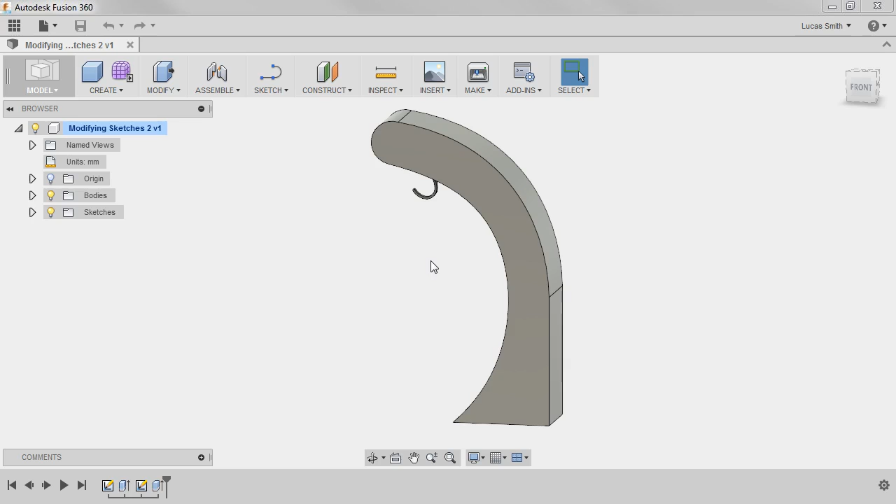This sketch will create a base for the banana hook, so I want to make sure that I create the sketch on the bottom face of the model. The geometry I want to project is on the top of the hook, so I'll switch to the top view from the view cube. I'll activate the projection command and click the short line at the top, and then all the edges in a clockwise direction.

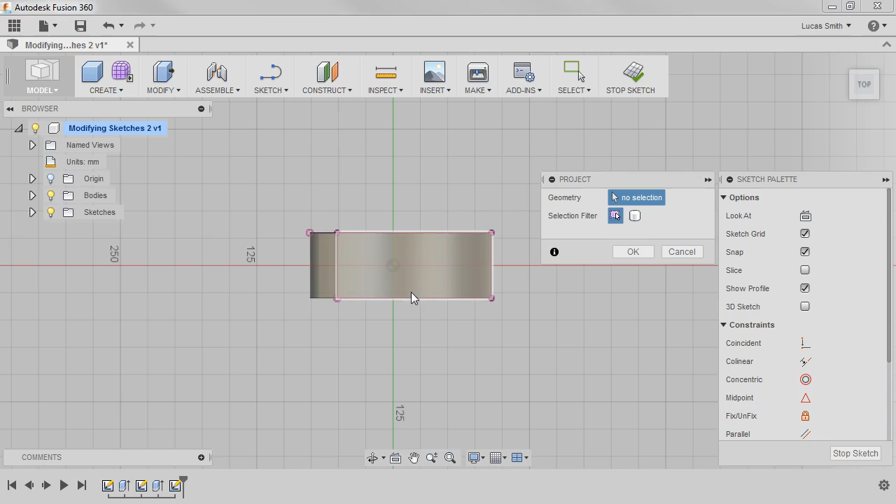When I get to the left edge, however, I can't select it because it's a curve. I'll have to fill this area in with a line. I'll click OK to end the projection and activate the line command.

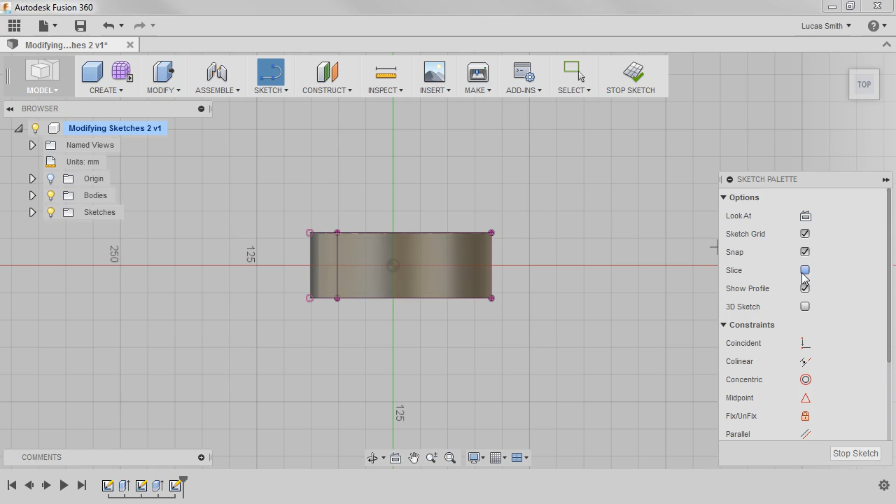Before I sketch the line, however, I'll make sketching easier by activating the Slice option from the Sketch palette. With that enabled, I can now easily see the plane to work with. I'll finish the left side by sketching a line between the endpoints of the projected geometry.

Next, I'll add sketch fillets to these corners. But since I can't alter projected geometry while it's linked, I need to first break the link to the existing geometry. I'll click both lines while holding Control, right-click, and select Break Link.

I can now add the fillets, so I'll activate the command and click both corners. I'll make sure the radius is set to 10 millimeters and hit Enter to add the fillets.

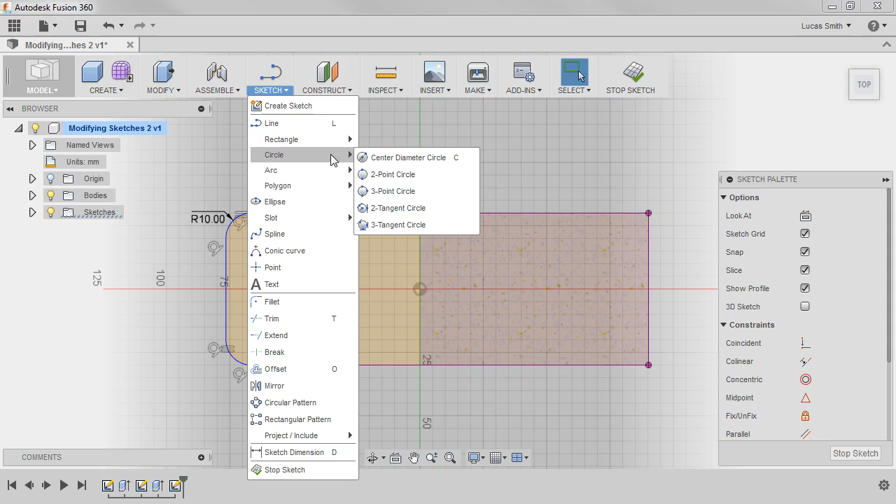Finally, I'll add a circle and pattern it to create the sketch for the feet. I'll activate the Center Diameter Circle command and start the circle on the center point of the fillet arc. I'll use the text box to set the diameter to 10 millimeters and hit Enter.

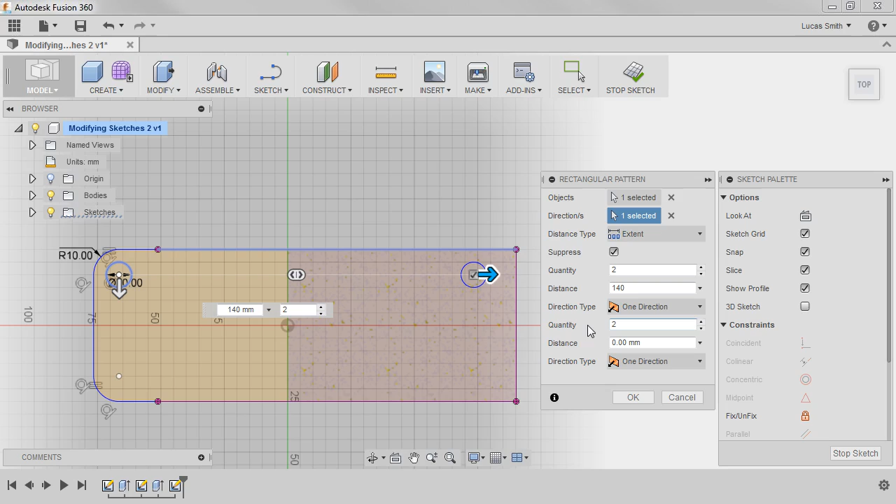To pattern the circle, I'll activate the Rectangular Pattern command and select the circle as the object to pattern. I'll set the direction to be along the top line of the sketch. And for the first direction, I'll change the quantity to 2 and distance to 140. For the second direction, I'll set it to a quantity of 2 and a distance of 40. I'll click OK, and the sketch is complete.

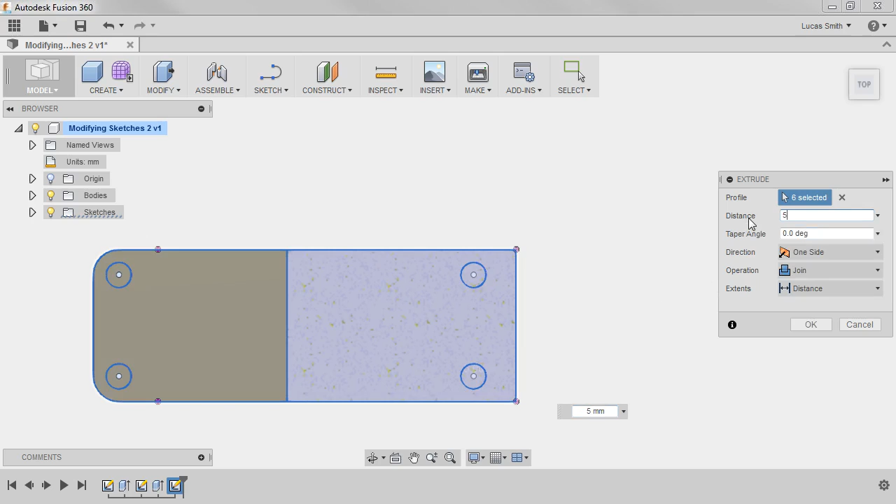I'll now make the 2 extrudes and check the mass of the part. I'll activate the Extrude command from the Create drop-down and select the 6 enclosed profiles of the sketch. In the Extrude pop-out, I'll set the distance to 5 millimeters, set the operation type to New Body, and click OK.

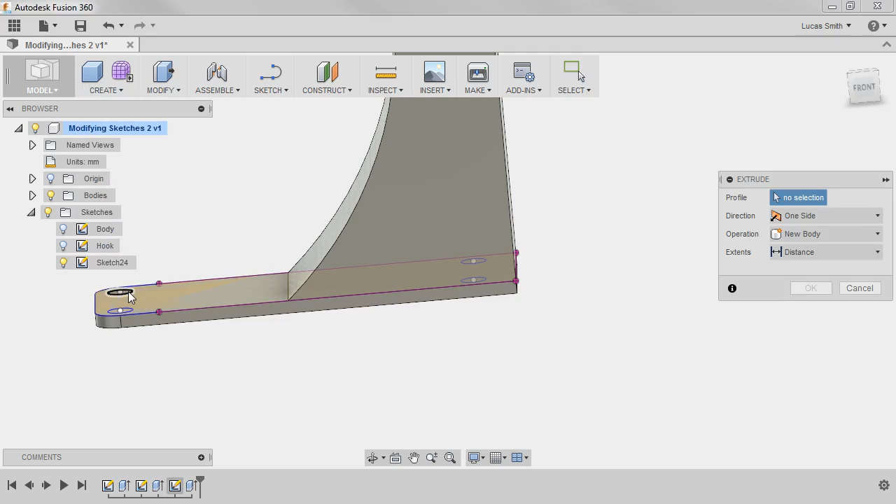To add the feet of the base, I'll make sure the base sketch is showing from the Sketches folder in the browser, then activate the Extrude tool. This time, I'll only select the 4 circles and set the distance to 10 millimeters. I'll make sure the operation type is set to Join this time, and click OK.

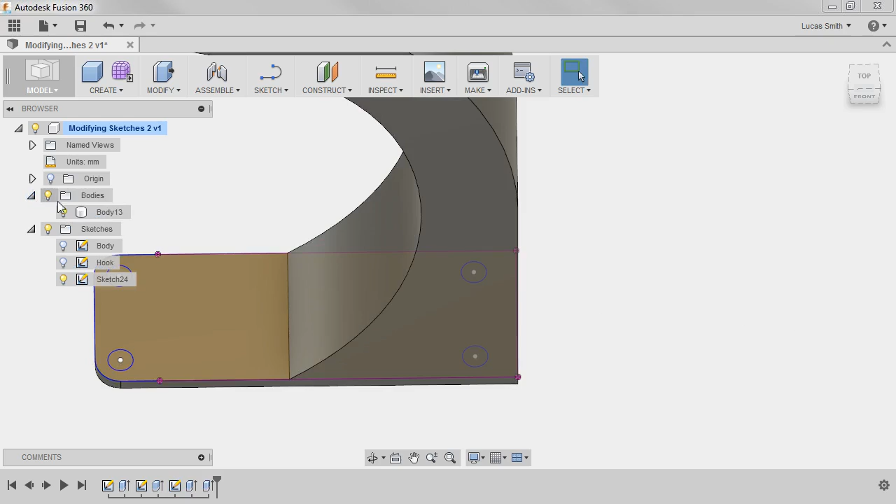Now I can go to the Bodies folder in the browser, right-click the body, and select Properties. I can see that the physical material is set to steel, and that the mass is 7,625 grams.